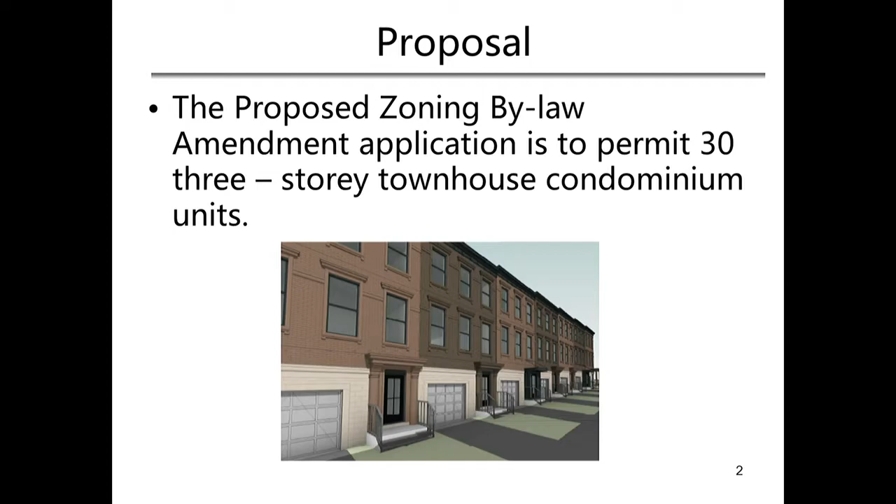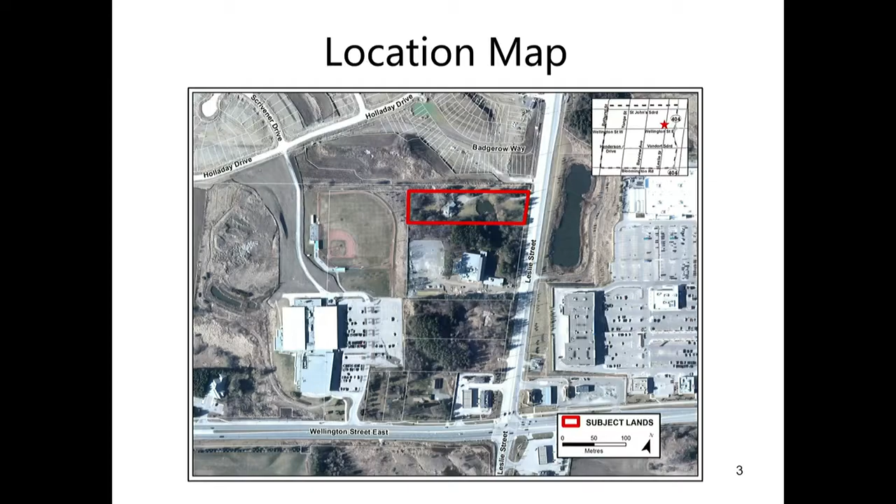The purpose of the amendment is to permit 30 three-story townhouse condominium units. As outlined in red, the subject lands are located west of Leslie Street and just north of the intersection of Leslie Street and Wellington Street East. To the north is the approved residential subdivision, Shimvest Developments. To the east is Leslie Street, a stormwater management pond, and the Smart Center Plaza. To the south is an approved site plan for the Salvation Army Church. To the west is the existing Stewart Burnett Park.

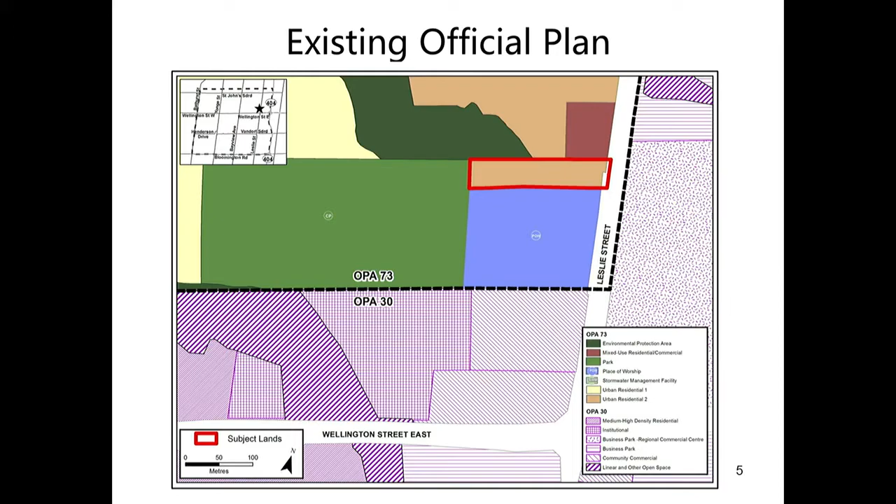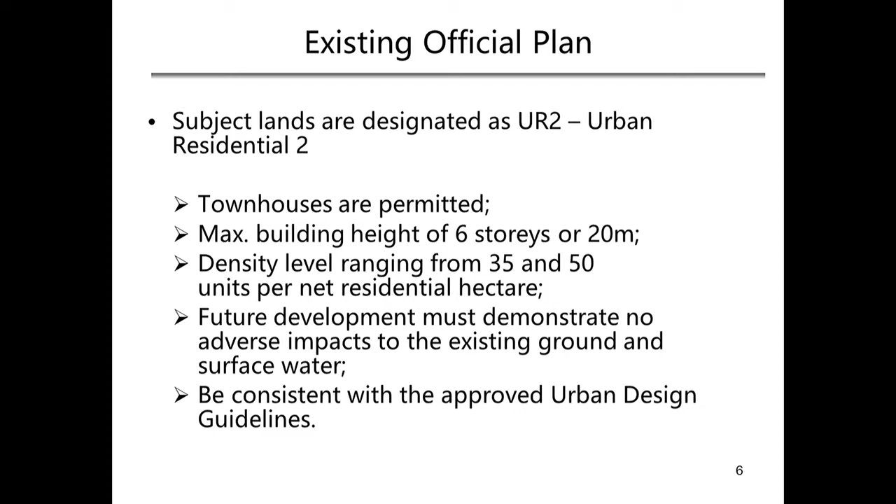As outlined in red, the subject lands are designated as UR2, Urban Residential 2, within OPA 73. The following are key policies within the UR2 designation: townhouses are permitted, maximum building height of 6 stories or 20 meters. The density ranges from 35 to 50 units per residential hectare, and all future development must have no adverse impact to the existing ground or surface water, and must be consistent with the approved urban design guidelines.

As outlined in red, the subject land will be proposed to zone for an R6, which is a townhouse zoning.

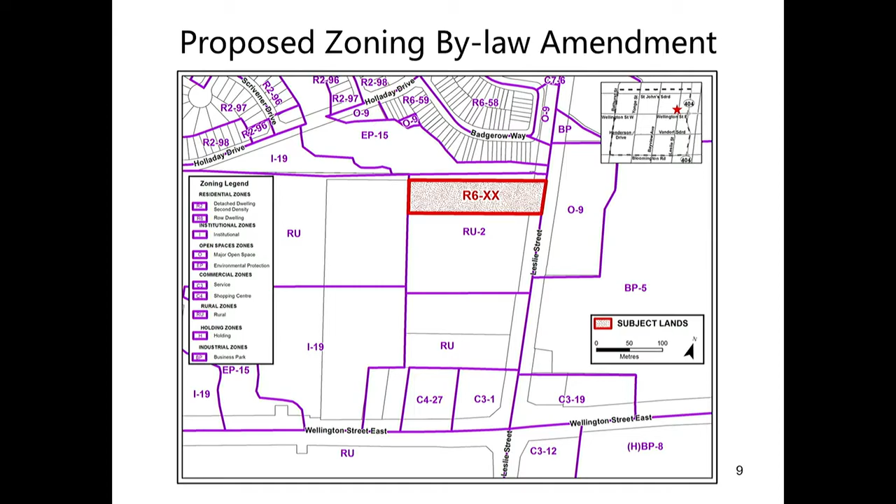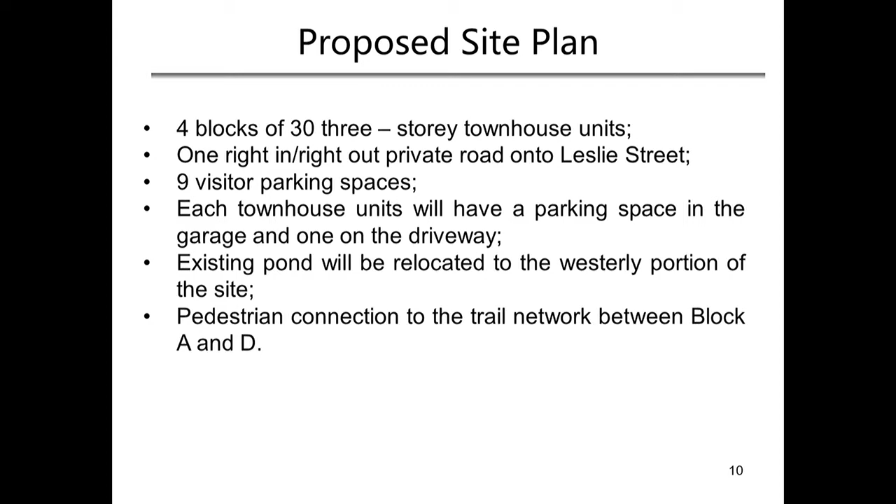In addition to the proposed zoning amendment application, the applicant submitted a site plan application. The following are highlights of the proposed site plan: 4 blocks of 3-story townhouse units with 1 private road, right-in right-out onto Leslie Street, 9 visitor parking spaces, with each townhouse unit having a parking space in the garage and 1 on the driveway. An existing pond will also be relocated to the westerly portion of the site, with pedestrian connections to the trail network in between block A and D.

Here's a quick visualization of what that looks like: 4 blocks of townhouse, with a pedestrian connection between block A and D to the larger trail network, and relocation of the man-made pond to the westerly portion of the site.

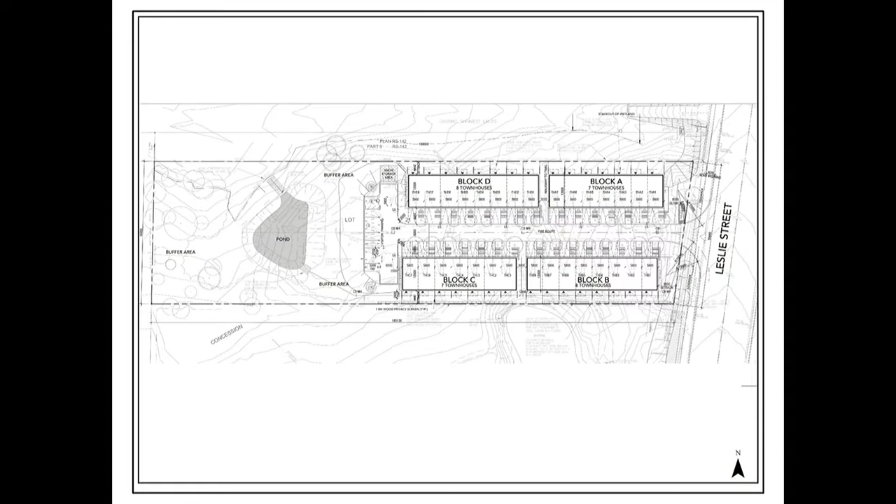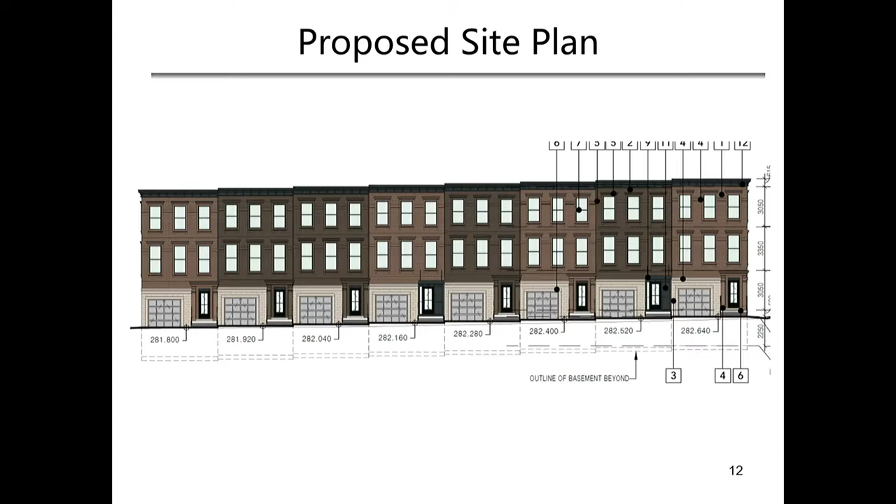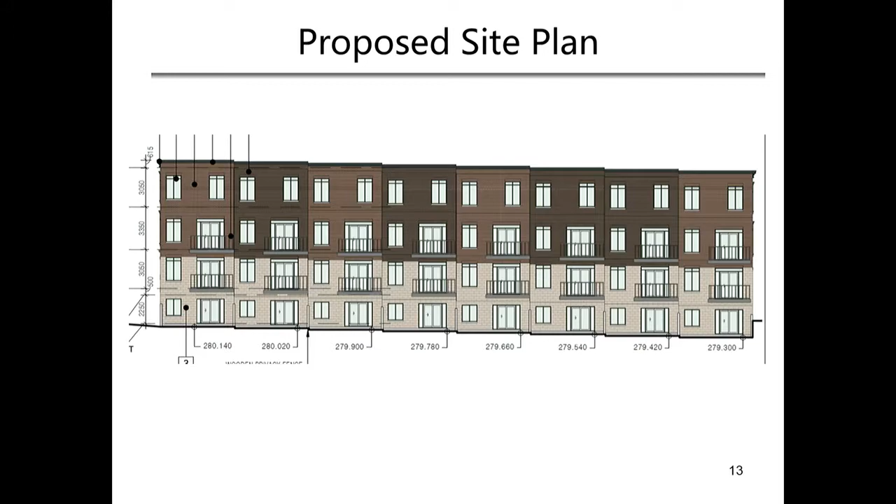The application was circulated and the first submission has returned and been forwarded to the applicant. The following are key highlights from the circulation. Staff will continue to review the applicability and appropriateness of the zoning bylaw. The applicant will need to provide staff with responses to technical matters such as stormwater management, drainage, servicing, retaining walls, landscape plans, and natural heritage evaluation. Staff will continue to evaluate the proposed flat roof design and overall urban design conformity. There is a barn swallow's nest in the middle of the subject lands as well.

The region also has technical comments with vehicular access onto Leslie Street. The Conservation Authority has also raised concerns about the relocation of the man-made pond, more so about the method of relocation. The Conservation Authority would like to see surface level drainage versus piping it underground and routing it behind the townhouse blocks.

The proposed site plan will be peer reviewed by Planning Partnership for architectural styles and streetscape. Staff will continue to work with the applicant to address the comments made here tonight as well as from the circulation agencies. A comprehensive report with recommendations will be presented at a future general committee meeting. Thank you.

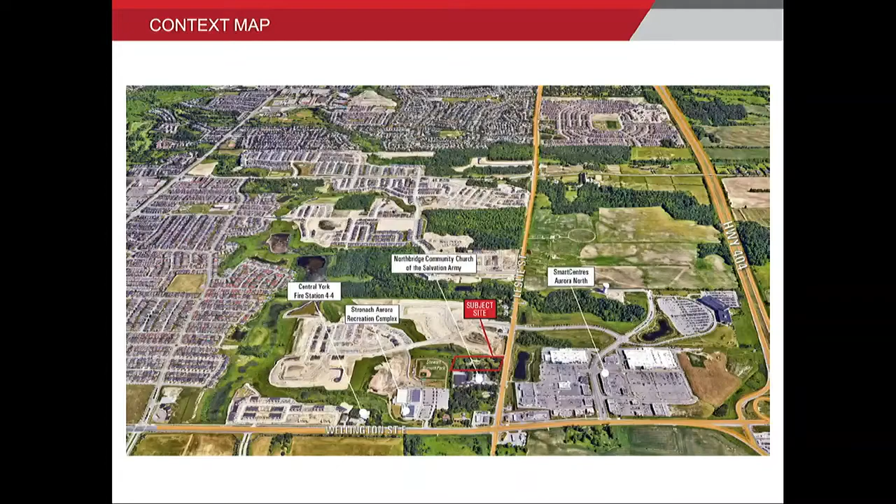You've just been provided with a quick overview of the development activity occurring along Leslie Street and within the surrounding area of the subject site. You're seeing a variety of building forms and development typologies, including low-rise singles and semis, townhouses, and also applications coming forward for apartment buildings up to about 6 stories in the area. We certainly think our proposed townhouse development provides for a diversity of housing options within this part of the town.

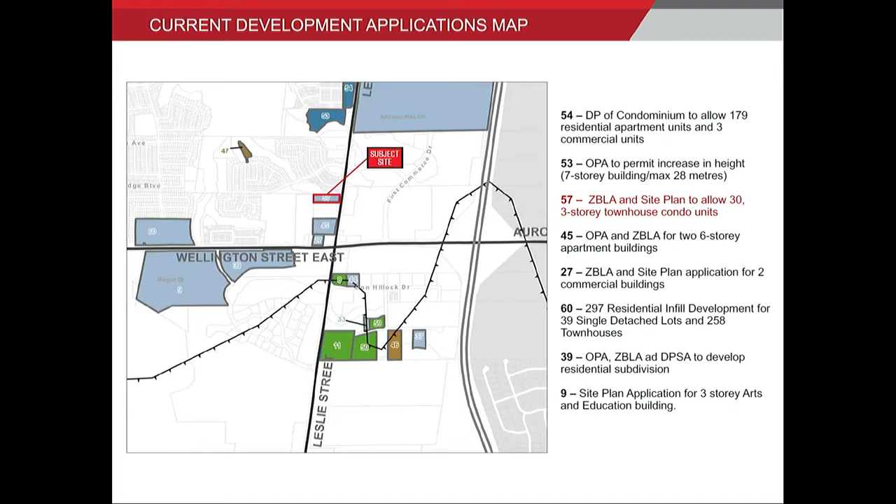Here is an application map showing ongoing development applications under review. As I mentioned, just to the south of our site, closer to Wellington Street, is an application for 2 apartment buildings.

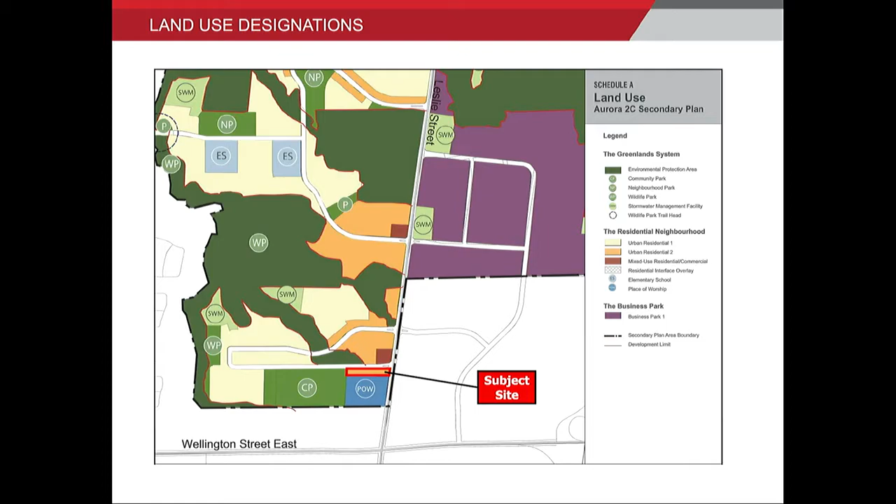Lawrence has taken you through some of the key policy mapping and context, so I won't repeat that. The underlying zoning is the general rural RU-2 zoning.

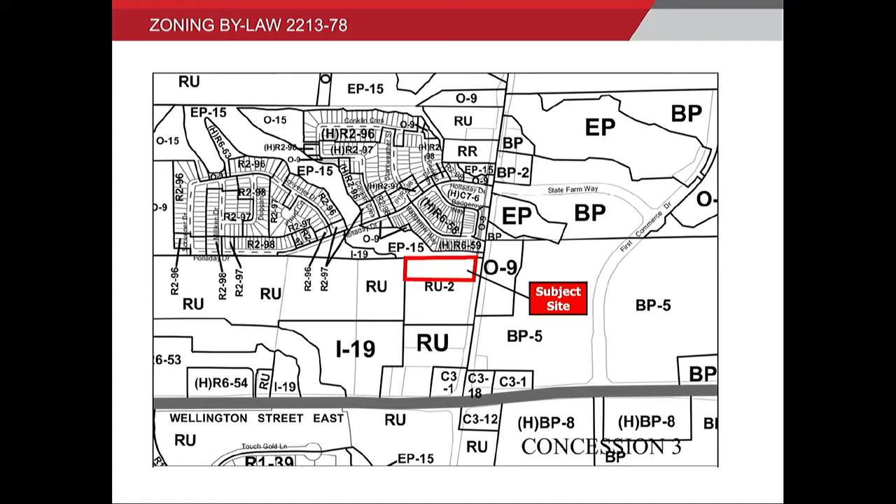As mentioned, there is an existing man-made pond located on the eastern half of the site today. Recognizing there is an existing environmental protection area off to the west side of the site, the thought was to move that feature so it creates a more contiguous feature that transcends beyond just our site, to lands to the north and west as well.

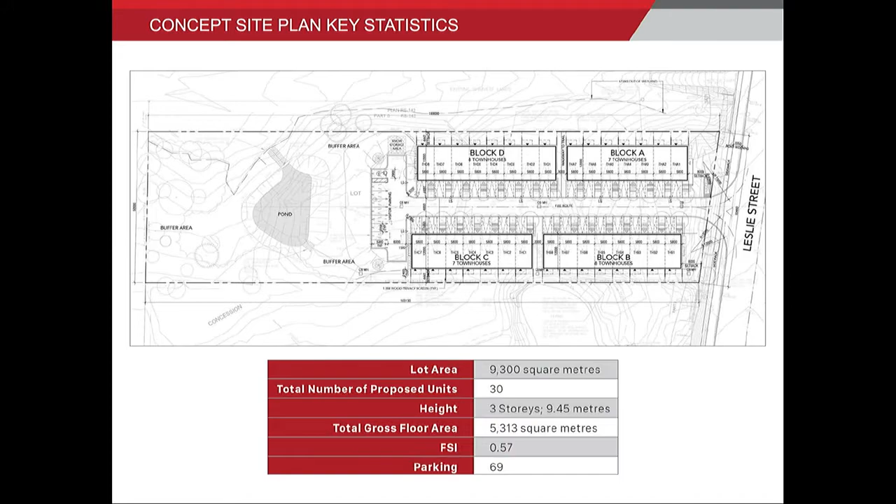You've seen some elevations of the proposal, going for a solid brick and masonry approach. The architects are trying to achieve more of a brownstone-style townhouse look and aesthetic. We've been provided with some comments from planning and your urban design advisors.

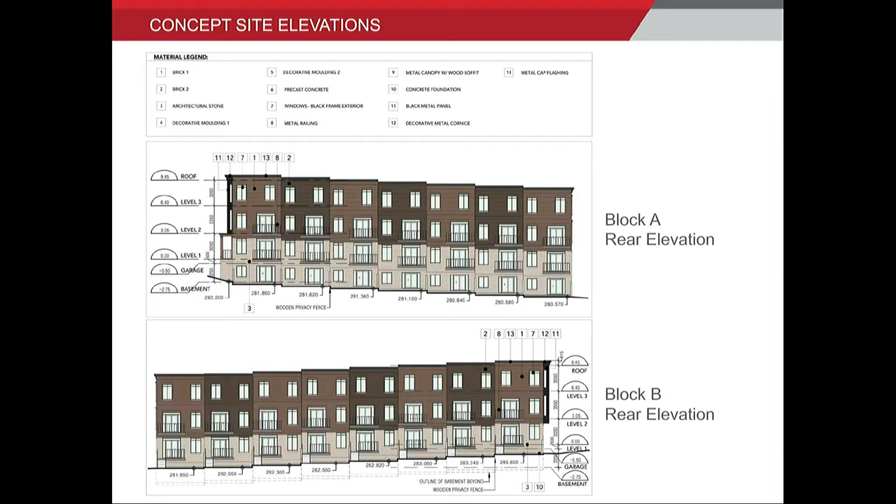These comments relate to ways to articulate the buildings in more detail, particularly regarding the frontages on Leslie Street and how it relates to the street, ways to de-emphasize the integral garages at grade, and ideas about twinning the garages to provide more contiguous landscaping along the street for planting trees and things like that. We've started to move along in terms of design and will continue to evolve the townhouse design.

As was mentioned, just to the north of the site is a strip of land owned by the town, planned to provide a trail connection from Leslie Street into a wider trail connection to the lands to the north and west. As part of our proposal, we're going to connect into that trail.

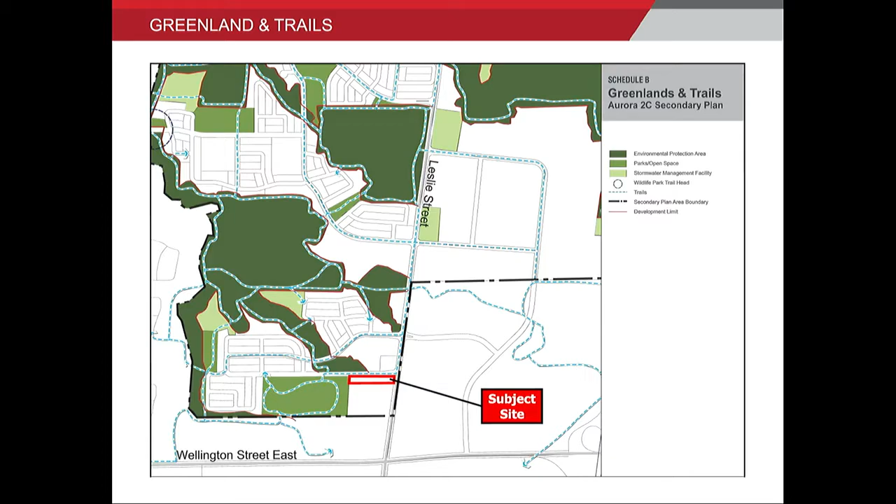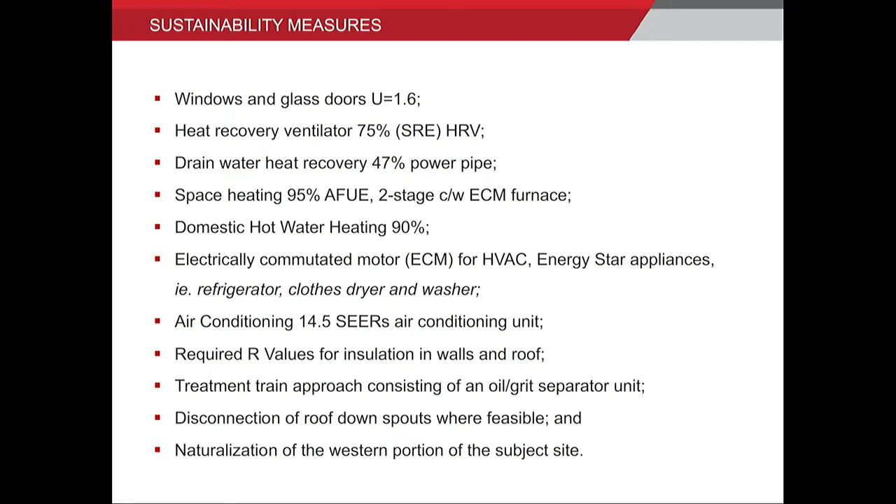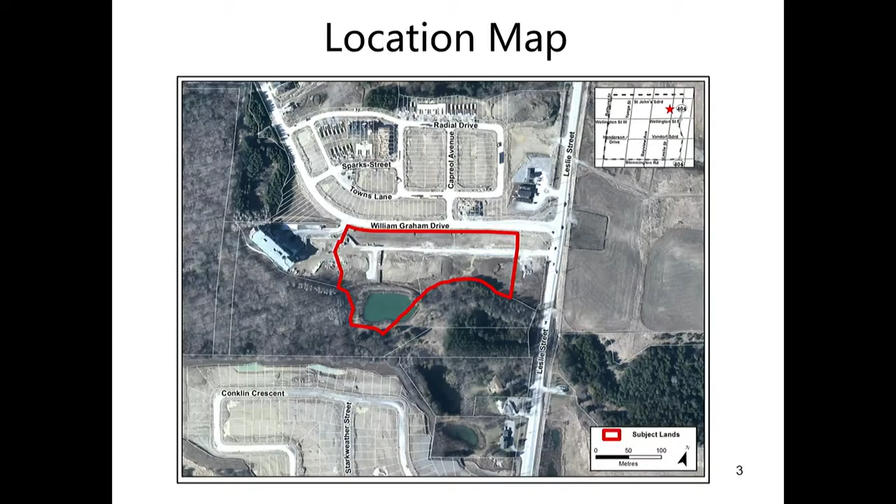The subject lands are located just north of the previous application we were looking at, on the southwest corner of Leslie Street and William Graham Drive, north of Wellington. To the north is a residential townhouse development currently under construction. To the east is vacant, future phases of the Christian Seniors apartment housing. To the south is open space and valley lands. And to the west is phase 1 of the Christian Seniors apartment housing, currently under construction.

So a bit of background. A zoning bylaw amendment application was submitted in November 2016, requesting to add assisted living units as a permitted use and to increase the maximum building height from 20 to 26 meters within the maximum permitted height of 6 stories. An information report was brought forward at public planning on January 25th, 2017.

Since that time, the applicant has determined that they want to further increase the building height from what was originally requested. This further increase triggered the need for an official plan amendment, which the applicant submitted in May 2017. Both the official plan and zoning bylaw amendment applications are being brought forward together in this report.

The proposed applications will be reviewed for consistency with the listed provincial, regional, and municipal policies. And as Lawrence mentioned, given that Council recently approved the comprehensive zoning bylaw, the application will be reviewed against the new bylaw rather than the listed 2213-78 bylaw.

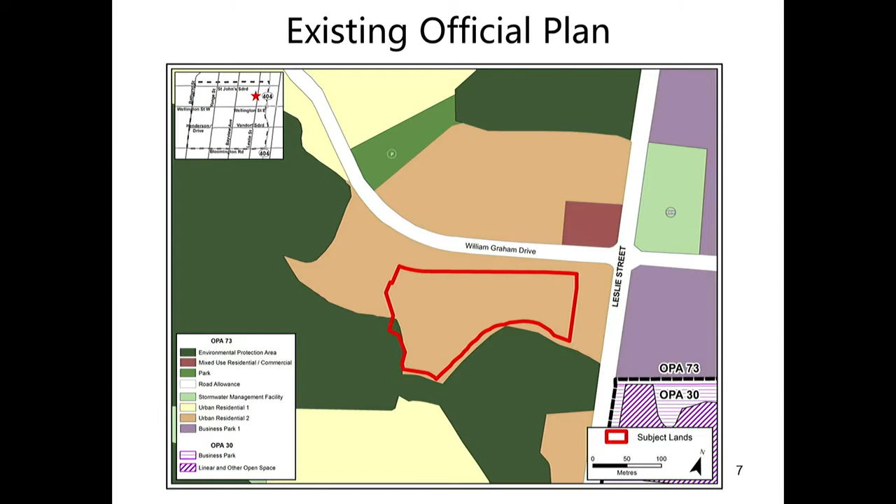The property outlined in red is designated UR2, Urban Residential 2, in the 2C Secondary Plan, OPA 73. The proposed official plan amendment is to amend the maximum building height policy of the UR2 designation to permit a maximum building height of 7 stories or 28 meters, whichever is less.

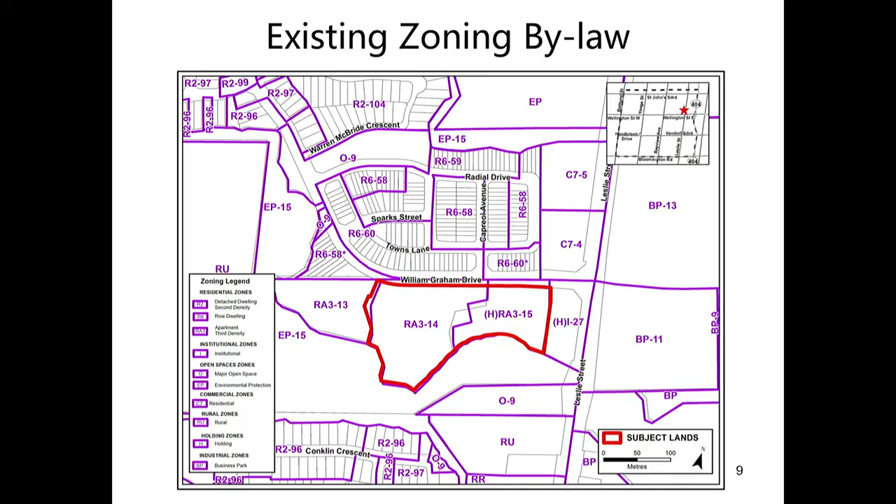Onto zoning, the subject properties are zoned RA3 residential apartment -14 and RA3-15 exception zones. The proposed zoning bylaw amendment, as noted earlier, was previously submitted before the comprehensive zoning bylaw was passed, so the naming conventions RA3-14 and RA3-15 still reflect what's in the old bylaw.

Just a quick summary of the zoning amendment requests. There's a more detailed list in the report, but they include increasing the maximum permitted height to 7 stories or 28 meters, adding assisted living units as a permitted use, and through that reducing the number of apartment units from 125 to 70 units in the RA3-14 zone, and from 100 to 76 units in the RA3-15 zone.

As well, to reduce the minimum landscape buffer from 7.5 meters to 4 meters, to amend the lot coverage provisions, and temporary relief from the requirement to provide a minimum of 8% of parking spaces below grade.

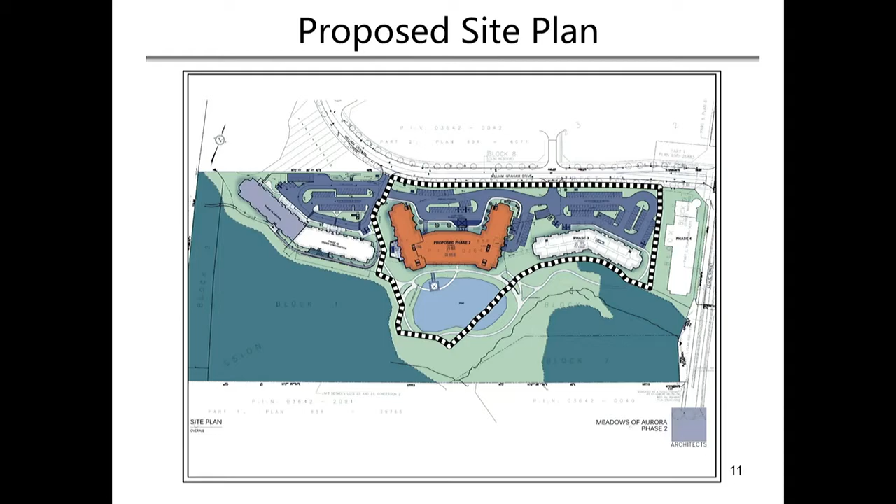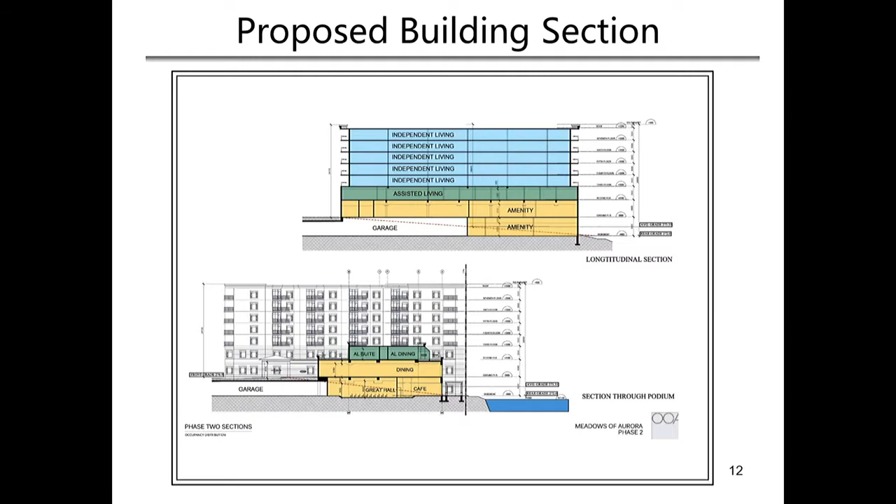The first submission has been circulated to internal and external agencies. The applications will be assessed for compatibility and appropriateness of the proposed amendments, and the region has confirmed that the official plan amendment is exempt from regional approval.

Staff will continue to work with the applicant to address any comments from the circulation agencies and from tonight's public meeting, and a comprehensive report with recommendations will be brought forward to a future general committee meeting.

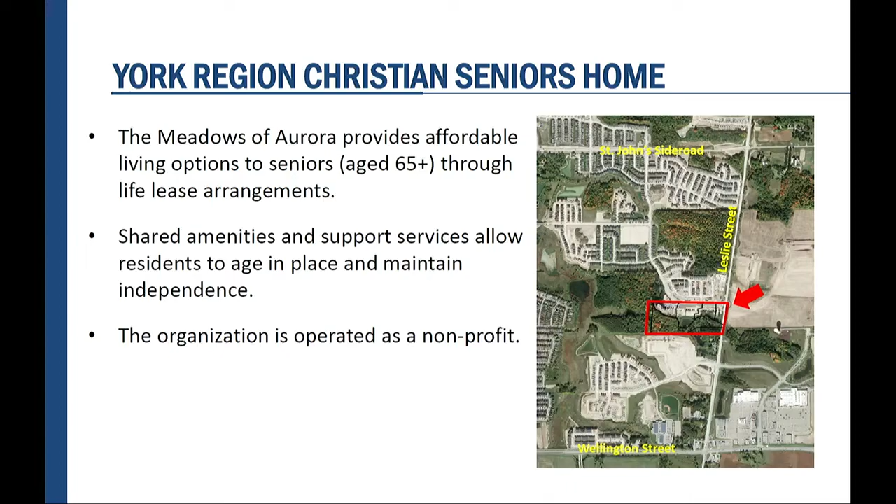Their goal is to provide affordable living for seniors 65 plus, and the intent of adding the assisted living units to the apartments was to allow people to stay in place longer in case one of their spouses was sick—there'd be care for them within the same building.

Phase 1A is already occupied, and I had a tour of it about 2 months ago. Phase 1B is under construction, and that's the second half of the building, so that's on the left.

Phase 2 and 3 will have approximately 250 apartment-style units, and the total number of units is 400. The zoning bylaw currently permits up to 480 apartment units, but the I&I work for allocation for servicing through the Aurora 2C Landowners Group has given this group 403, the equivalent of 403 apartment units.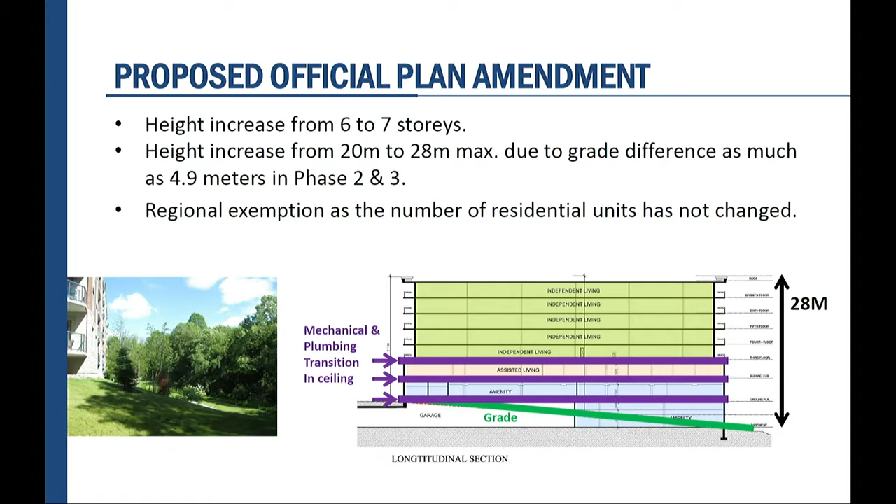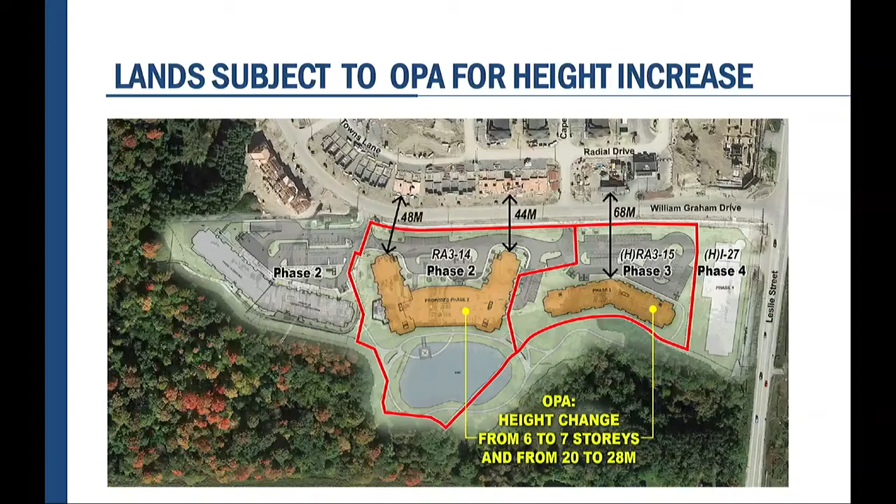They'd like to reserve the opportunity for assisted living in Phase 3 should Phase 2 be successful, so we've allowed some units in there. The assisted living units are considered institutional units, and therefore allocation from the region and the town isn't required for those. In addition, a change to the zoning bylaw that Caitlin mentioned was an adjustment in lot coverage.

This is just to adjust the split between the lots. The ground floor area remains relatively similar. One of the buildings in the Phase 3 building was pulled back from the Phase 2 building, reducing its coverage on site.

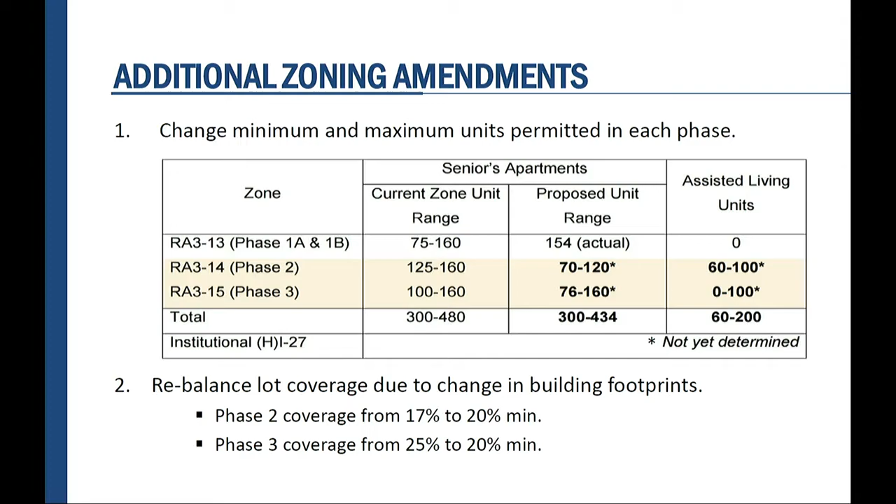These are the amendments. We wanted clarification on the associated uses with the assisted living: an adult daycare center for drop-off for outside seniors who may have Alzheimer's, office space for healthcare providers such as doctors, dentists, denturists, massage, and chiropractic visitors, a tuck shop for residents, and a gathering hall and meeting rooms on several floors, which would service the central building and the two outlying buildings for larger functions.

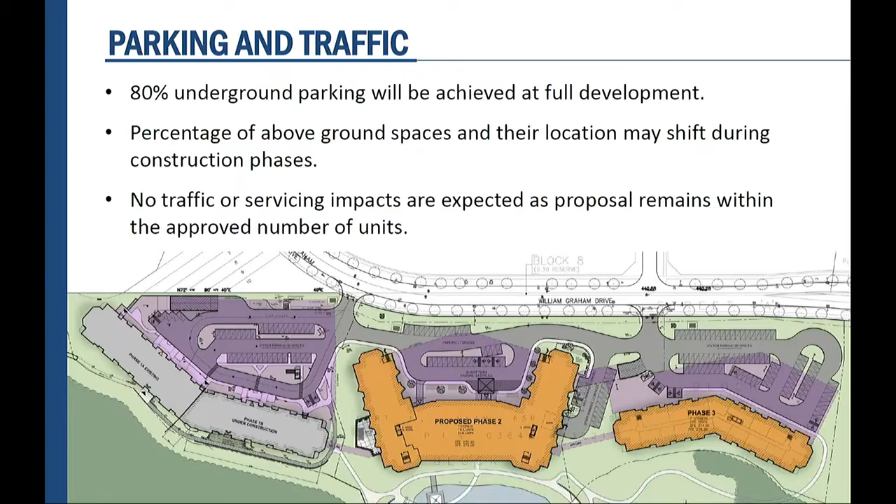Since the number of residential units aren't increasing, we don't anticipate any impacts to the surrounding roads from a traffic perspective. In conclusion, we now need an OPA due to further thinking on the part of the board, but it's not a significant change to the plan. Most of it's already been approved. The outside of the building isn't going to change. It's going to be 3 meters taller and set back further from the street, so there should be little or no visual impact on the surrounding lands.